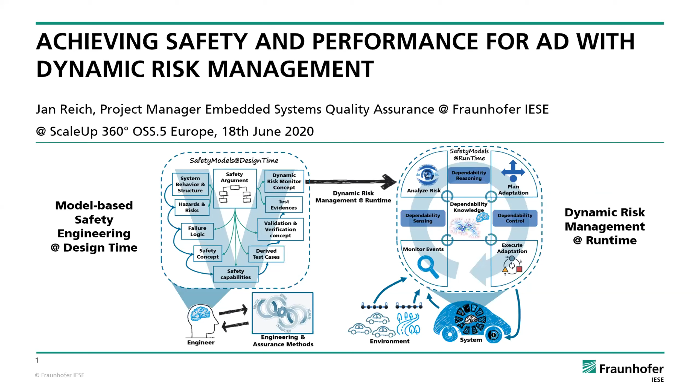But the more interesting bit I'm going to talk about today is how we actually assure more innovative systems that contain high levels of intelligence and also cooperative safety concepts. So it was a perfect talk, my predecessor, which dealt with behavioral safety. My talk is basically about how to operationalize behavioral safety at runtime by using safety models that are used at runtime, where the machine effectively thinks on its own about safety issues and tries to come up with as performant as possible a way to operate in various operational design domains.

So what I have to offer today is, first I'm going to talk a little bit about the motivation of why current safety engineering techniques are actually not sufficient to assure high degrees of automation. And our approach to dealing with these issues is to shift parts of the models of the safety assurance to the runtime. And how do we do that? We are formalizing risk and capability models in order to teach the system how to think about safety issues and come up with a continuous safety assurance at runtime. And in the end, I have a small video demo that hopefully works that intends to show you how dynamic risk management looks and feels.

But first of all, I'd like to show you a small video, maybe of a parallel universe where actually all the challenges that we have already talked about seem to be solved already. So just watch it shortly.

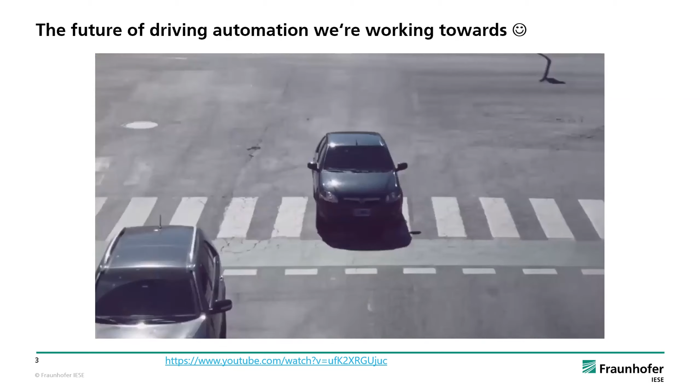Maybe remember just a nice music in the background that unfortunately doesn't play in the stream.

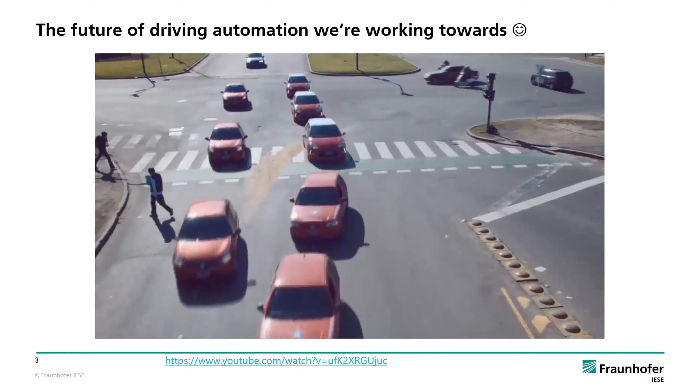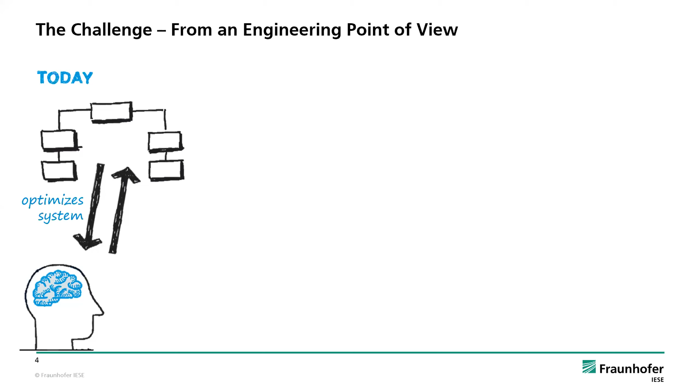But if we look at the challenge and put ourselves in the head of a safety engineer, what we're doing nowadays in order to get safe behavior of autonomous driving is effectively thinking at design time a lot about how we optimize our system in order to be safe. This means in particular, we need to anticipate the context that our system will be in contact with all the time. These are other vehicles, the environment, other traffic participants like vehicles and pedestrians and so on, but also if we have cooperation in place, we can use collaborative knowledge for that. And we might also be able to control other systems in our vicinity.

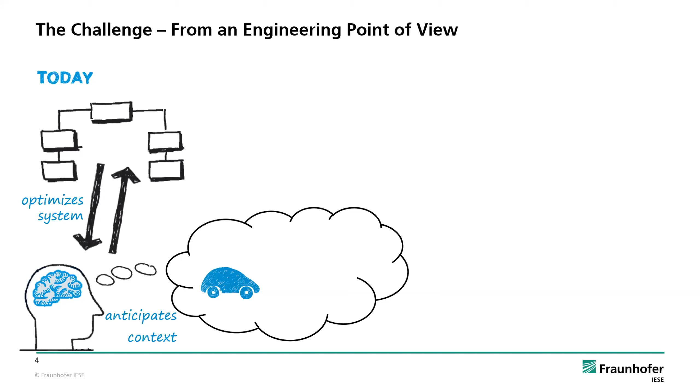And having anticipated the full context and all the situations, like the situation categories and scenarios that we have seen in the previous talk, what we're doing is picking out the behavior for our system. We are implementing it for this anticipated context and making sure it is safe. But this has some problems, in particular if we're dealing with high levels of intelligence being necessary in order to operate in very unconstrained environments as well.

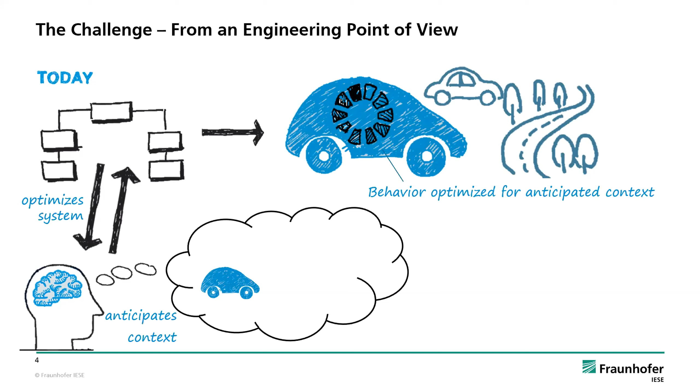So this means we have a lot of uncertainty in place if we want to think of any situation that can occur, since we don't know whether we really covered the situation space both at design time and at runtime. And on the other hand, we also have uncertainties with respect to risk control availability. This means we have certain safety capabilities that are integrated in our car, but we don't even know whether those safety capabilities will be available in all the situations where we need them. And there is a way out of that, and that is done nowadays.

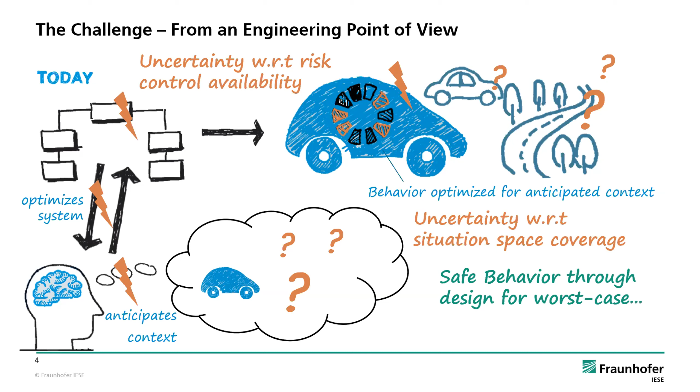And this is actually that we are designing our system and our behavior so that it is safe in the worst case, namely in the worst case of all the situations that our ODD consists of. And at the same time, if we are always expecting, exemplarily spoken, Usain Bolt to jump out behind every parked car, this means our car is ready for it. But in all the situations where the worst case does not occur, we have a very constrained system performance.

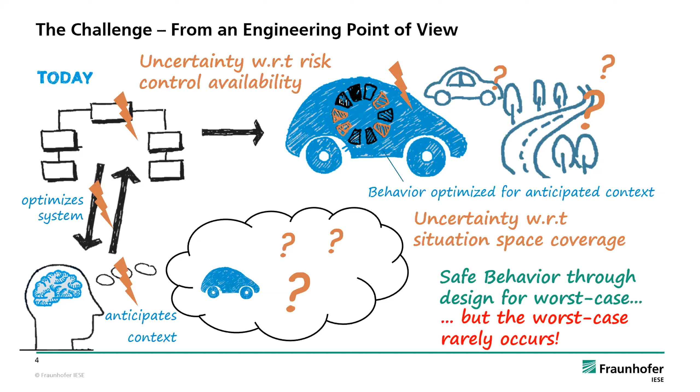And this is actually what I'm going to show in this talk is addressing, and it is called dynamic risk management. The idea behind this is that we are not trying to anticipate every situation and scenario that will occur during the system operation, but that we are trying to teach our system what is the relation between certain situation factors that are influencing risk and the final risk assessment on the one hand. So making this relation explicit in a maybe rule-based manner, and on the other hand, making the influence factors for those risk control capabilities and their availability explicit somehow.

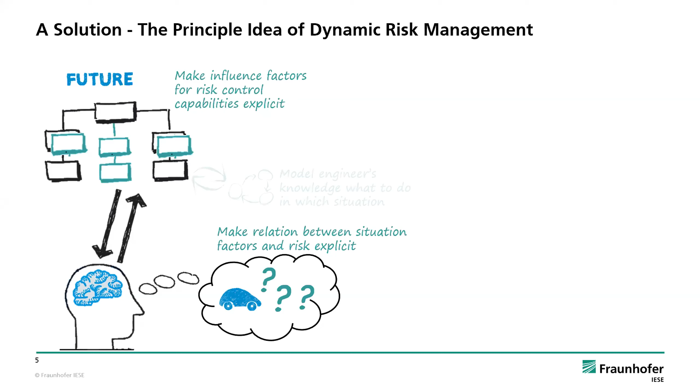And if we are having this information basis, so what is the risk of our situation? On the other hand, what are the capabilities that we are currently having to control that risk? Then we can also model the engineer's knowledge of what to do in which of those risky situations. And what we're then coming up with is a concept that is called dynamic risk management, which effectively means our system has a certain intelligence involved and kind of looks at the environment with the safety glasses on and looks for events that might be an indication for safety criticality or not.

And this means then based on those monitored events, we're analyzing risk and capabilities, we are performing certain reasoning activities, and then we are planning and executing adaptation in order to come up with a behavior that is below the accepted residual risk. And on the other hand, that is performant enough to get the best possible situation performance out of it. And for executing this dynamic risk management cycle, there is some knowledge that is needed, and this knowledge is explicitly those rules that we have to define at design time.

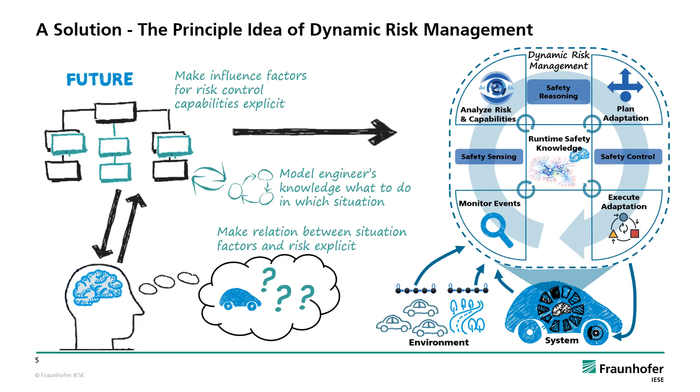So one precondition in order that we can observe whether the behavior of a system is safe at runtime is actually that we need a specification of what safe nominal behavior means. So this is, so to say, the step 0 of doing runtime safety assurance or analysis: that we have a specification of the safe nominal behavior. The example that I picked out for today is the RSS rules. I would think that this is familiar to most of you guys, which are effectively a set of rules that try to formalize both explicit and implicit traffic rules that people adhere to.

And in this case, we have an equation that is expressing what a safe longitudinal distance between two following vehicles is, where the left one is the ego vehicle, and here we have a lead vehicle. But there also exist rules for other traffic situations. And those are derived based on kinematic parameters. So the big question here is, if we are deriving a safe distance specification based on kinematics, then for all of these parameters we need to somehow assume what the deceleration capabilities of our lead vehicle are in the current situation. And at the same time, we also need to know what our capabilities are in the current situation, for instance, the minimum deceleration capabilities. And so it boils down to what we are assuming for those parameters in the current situation.

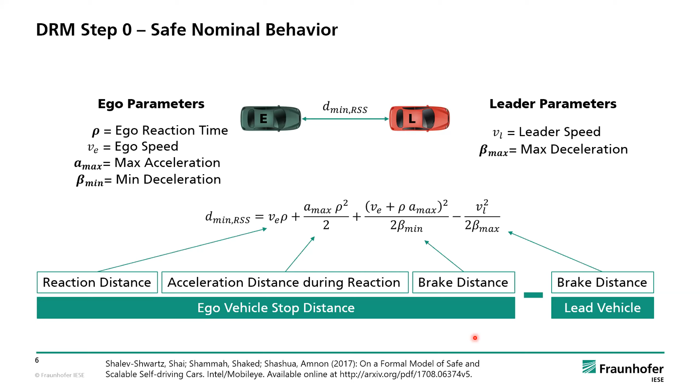But we at Fraunhofer asked ourselves, can we do better? Because again, it is not always the worst case happening, so to say. So can we somehow detect what assumptions are true in the current situation? And this is actually what dynamic risk management is about.

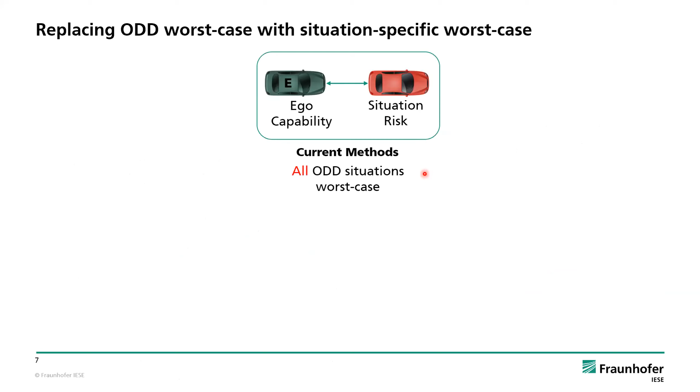So we're trying to actually replace or enhance the current methods that are, so to say, dealing with the worst case from all ODD situations on the one hand by looking at, well, what is actually affecting in my environment, what the situational risk is.

And if we are looking at a car following scenario, then we are seeing, for instance, looking at our own human experience, well, when I'm driving as a driver, then I would assume this red car not to brake without any reason, so to say. But I would say that the situation somehow around this red vehicle is actually forcing it to decelerate.

So this could be, for instance, a truck that is driving with a much lower speed, or it could be like this blue vehicle merging into the lane just in front of the red vehicle, or it could be, for instance, a traffic jam that is actually forcing this red vehicle to brake harsher than in normal driving. And that is somehow subsumed with a braking intention that we want to find out during dynamic risk assessment, but it is also related to the braking capability.

And there we are also looking at physical inputs. So for instance, whether a certain braking distance for this vehicle is effective also depends on a road surface coefficient. And risk is not only about whether braking happens, but also how severe the collision consequences are if that braking is about to happen. And there, the usual models are typically dealing with that delta speed between vehicles, where we can get an approximation of what the collision severity might be.

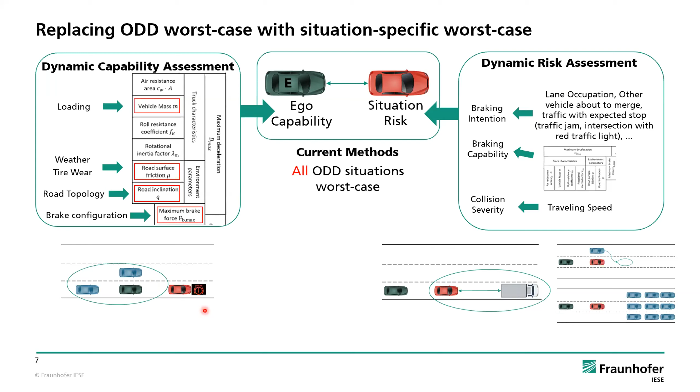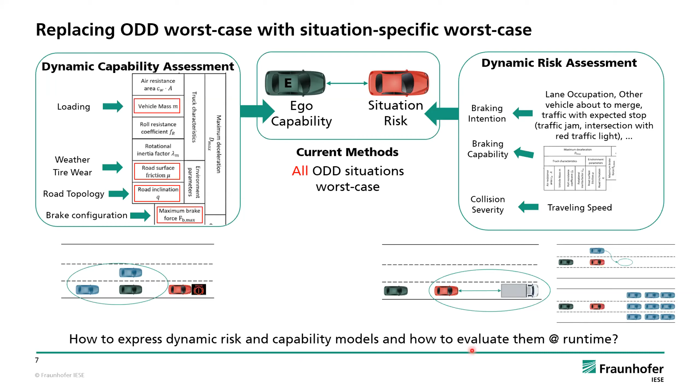then my capability space is constrained. And so if we want to teach those kinds of activities, capability and risk assessment, to the vehicle itself, we need to find a way to formally model those dynamic risk and capability models so that they can be evaluated at runtime. Starting with the risk modeling: basically expressing how a certain behavioral hazard that our system may have at a certain point in time leads to an accident. And typically this goes over a critical situation and controllability aspects.

And today this is mostly done by using surrogate safety measures like time to collision, or for intersection scenarios we have post encroachment time. There are really a variety of different surrogate safety measures, which all have in common that the critical situations are found by using simulation. So this means we are taking a scenario catalog, like my predecessor has talked about, and computing the time to collisions for a lot of variants of the input variables for those safety measures. And then we are seeing whether we get an accident or not.

And what is also interesting about those is that they are mostly removing situational context from risk modeling. For instance, we can compute the time to collision just based on the speed vectors and the directions of two cars, and then we have a conflict point. But if we look at how humans judge risk, we will see that the risk is pretty much dependent on whether this exact behavior is happening on an intersection or on a highway. So the risk judgment might differ in those cases. And this is also a major weakness of the metrics that we have nowadays, that they don't consider situational context knowledge, like described on the previous slide, sufficiently. So they are much more worst case than they would need to be.

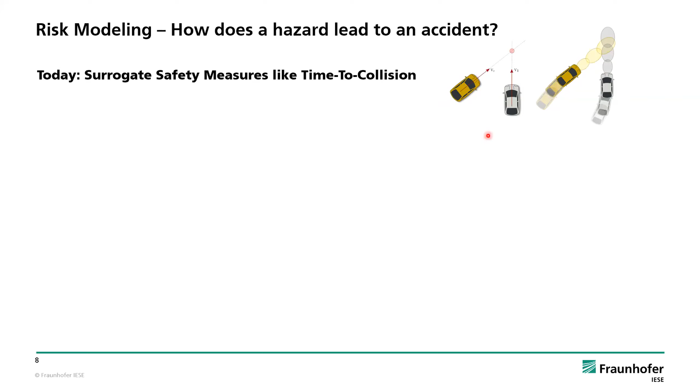There are also probabilistic variants of those where we don't deal with points and vectors, but we are dealing with spaces, so to say, that are overlapping based on probabilistic constraints that we're having.

So how we could do that tomorrow is actually to really factor in situation knowledge. And this means making situation class specific risk metrics that are explicit with respect to the situation that is occurring. So if we're looking at this simple intersection scenario where the ego vehicle should turn right and a pedestrian is passing the pedestrian way and the green light, then we could actually model what is the expected behavior of the ego vehicle, which might be, so to say, an abstracted functional model of what, for instance, the traffic regulations demand of my ego vehicle in order to be safe.

This means on a very high level, we need to determine the right of way properly. We need to determine the pedestrian presence at this space, so to say. And if we know that there is a pedestrian present, we also need to predict whether he is going or not, because if he is staying here, then we are allowed to drive, even if the pedestrian light's green. So this is, so to say, the expected behavior that we model for our ego vehicle.

In a subsequent step, we are thinking about what are unsafe deviations that will lead to a pedestrian run over. And for each of those functional blocks, we are thinking about critical deviations. This means, me as an ego vehicle, I determine the right of way wrong. I have a confusion, and this might lead in consequence to something that is critical. Namely, if I misjudge that the pedestrian traffic light is green, then this will lead me to driving there, maybe, if I don't detect the pedestrian as well.

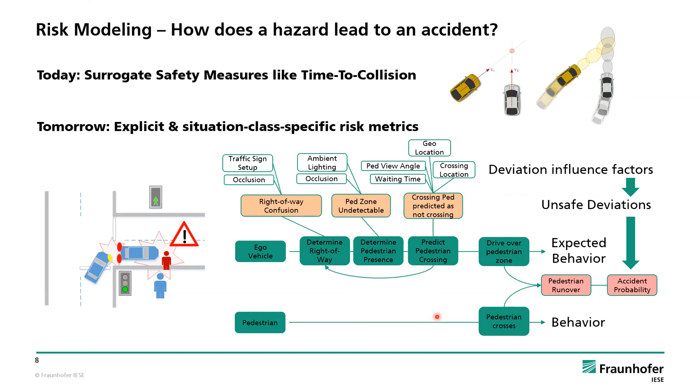This is not a formal model right now, but what we are using in order to make these causal models really formal is Bayesian networks, not only because they can be computed pretty efficiently at runtime, but also because they have the power that you can propagate uncertainties. If we're looking back at those influence factors, it's not possible to perceive them perfectly. There will always be a perception uncertainty with respect to those. And this is the reason why we are using those Bayesian networks to factor in perception uncertainties and propagating them to the behavioral risk.

And the reason is that if we wouldn't do that, we would get a risk assessment that, for instance, there's a high likelihood that we have a certain accident in the end. And if this assessment was made based on very, very uncertain information, then actually we should probably be a bit more worst case than we should be if we have perfectly certain or more certain information.

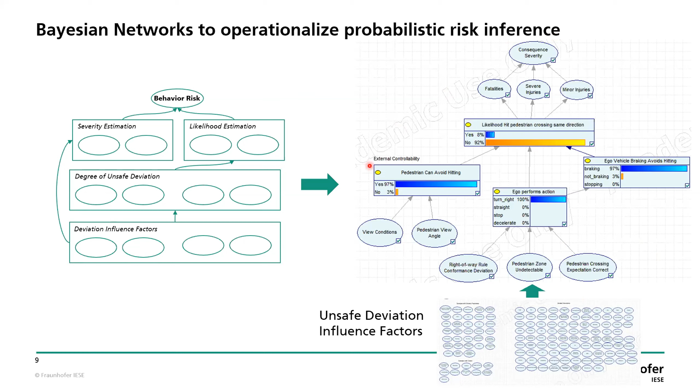And what we've developed there is actually a pattern structure that can deal with a variety of different situation classes. You see just a small excerpt of the different influence factors that we have just for the crossing situation that we've just seen. And these are then effectively fed into those behavioral deviation nodes, so to say. In the end, we have a causal model that is allowing us to get an idea about risk under uncertain information. And we have coined it with the name SINADRA. It's called Situation Aware Dynamic Risk Assessment.

And it not only has the runtime aspects where we just get out a Bayesian model that we are inferring at runtime. The important bit from a safety engineering perspective is also that we make sure we didn't forget any of the situation factors, and we have the necessary confidence that we didn't underestimate the risk in our Bayesian network model.

And for that case, what we are doing is we're taking as a principal input the ODD and an AV behavior model, and by using model-based design time safety engineering, we are coming up with something that looks more or less like a HARA, but is much more detailed and does not only try to search for the worst case situation, but analyzes situation classes, so to say. And based on this sub-ODD specific risk causality model, we are using the pattern that I've just shown and parameterize it with a situation factor distribution.

This means, for instance, that we are exploiting the specifics of distributions. For instance, if we are in commercial areas, which our ODD consists of, then we have much different distributions for pedestrian appearance at different places, and we can factor that into the Bayesian network by looking at what are the principal ODD subspaces that we are having, and what are the situation factor distributions for the influence factors. And this is all what we are building a safety case out of.

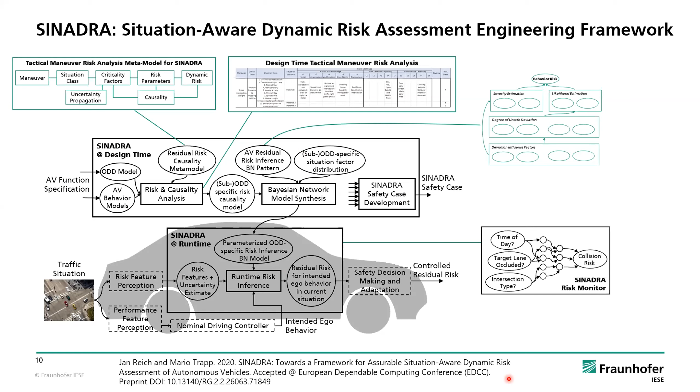So coming up with a safety argument that comprises these activities and tries to make sure that the runtime model that we are inferring at runtime is, so to say, safe with respect to an argumentation basis. So we also just got a paper accepted that is describing the building blocks of this framework. And now, having described how a risk assessment can work, meaning how a hazard relates to an accident over the situation influences, let's look at the other side, which is dealing with the dynamic safety capability assessment.

And there we have now researched and also applied, I think over a decade right now, the concept of conditional safety certificates. Model-based means to express variable safety concepts of our ego vehicles. So we can, for instance, think of this situation where we have a car following scenario, we definitely have the emergency braking capability. In addition, we would also have the evasion capability, but let's exemplify the conditional safety certificates for the emergency braking capability. And this means that we first need an idea of the architecture of our capability functionality.

So keep in mind that this is a safety functionality here that is engineered at design time according to typical standards that we have, like the ISO norm. And if we're looking at the emergency braking capability, then we can, for instance, monitor our brake system itself for what is your current tire wear, what is your principal braking force that we can apply at all in the best case, but also in the current case. And if we are looking at the vehicle platform, then there we would maybe get some information about the dynamic mass that our vehicle has.

This is much more important for trucks, obviously, but we might also look at the environment for getting an idea about the road surface conditions, which also affect how effective our emergency braking will be. And as a special feature, since we're using here a service-based modeling format, we can also use vehicle-to-X monitoring functionality to also get information on an assured basis from a different vehicle. So this is effectively how the safety channel looks. And the conditional safety certificate is attached to this service architecture that we're seeing here, and it actually defines certain safety guarantees that we can give for those services.

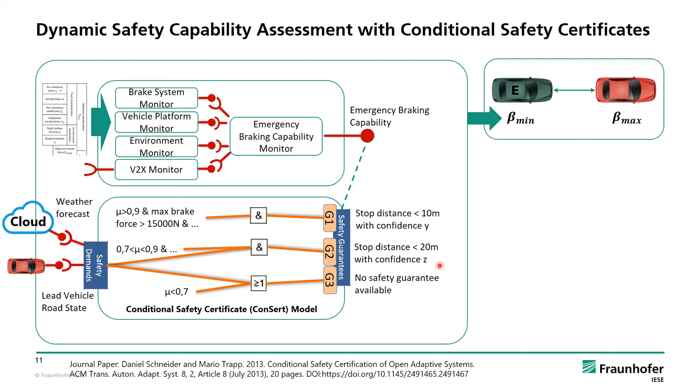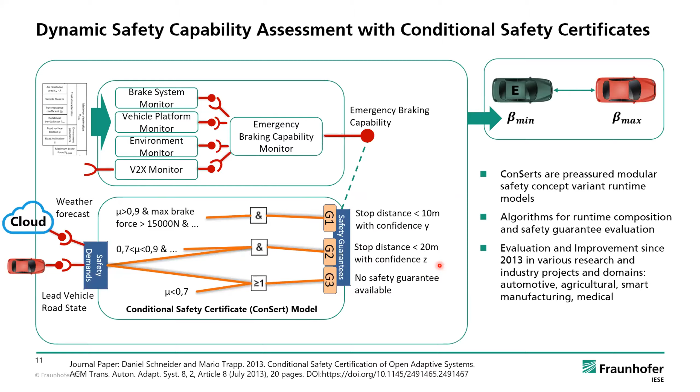So this is not just an easy model. It's just the result of the stuff. We want to not shift everything into the runtime, but just have some variables that we want to resolve. Okay, I will skip over that and just show you how this ConSert works in practice, if it works.

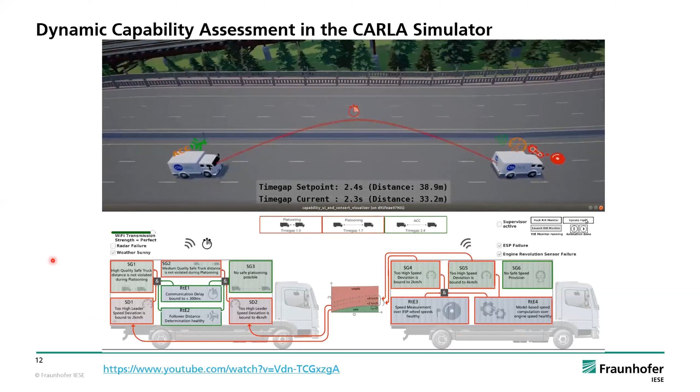Last but not least, I want to talk very quickly about the design time safety engineering aspect. The models that I've just shown, these Bayesian risk models and the ConSert models, don't come out of nothing, but have the whole design time safety engineering backbone behind them. So for each of those models, we need to make sure that we have proper engineering methods in place that result in those models, and that the models are capable of being consumed by the car in a fully formal manner.

And how we at Fraunhofer approach this: for the design time aspect, we have a design time engineering toolchain called safeTbox, which allows us to produce those runtime models in an assurable manner. What comes out in the end is a safety argument, along with the evidence that we have the right models for the right tasks. And the runtime component is called safeTsupervisor, where we have realized, based on the ROS framework, runtime components that are able to consume the models we produced at design time semi-automatically, and then run them.

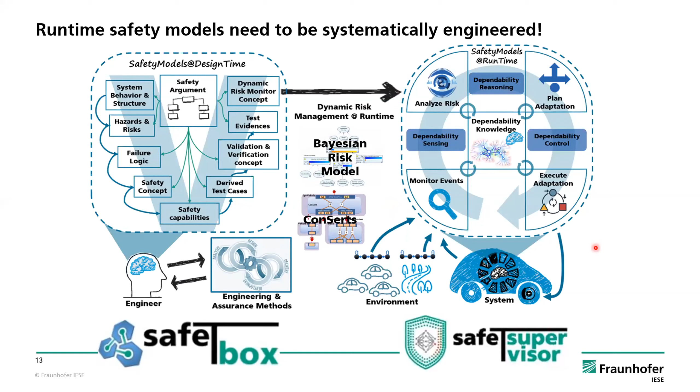So coming to the conclusion, what is very important in order to make this dynamic risk management concept work is that we need formal definitions of what safe operation means in terms of behavioral safety in the absence of failures.

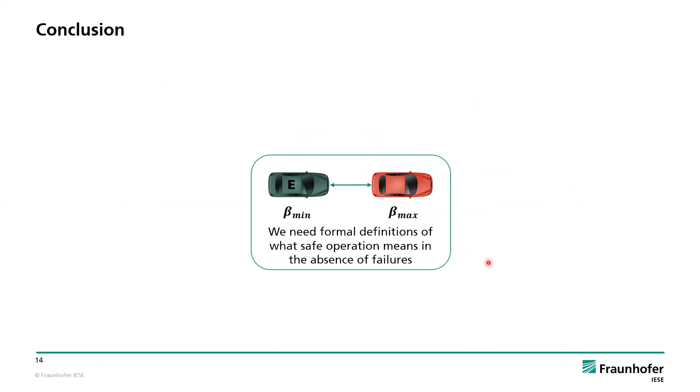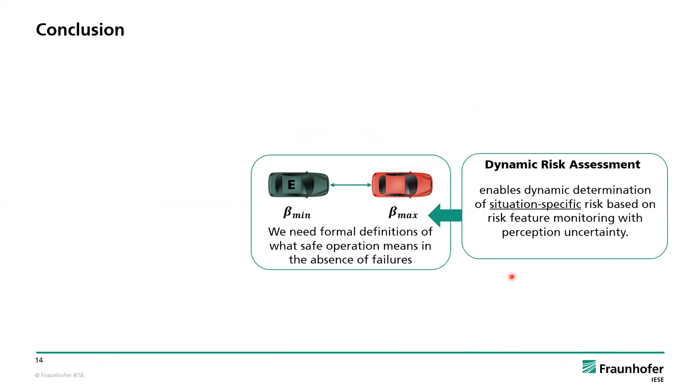And based on such a definition, we can then decide what are the situation-specific factors that we need to monitor in order to get an idea about dynamic risk. On the other side, we can use conditional safety certificates to express variable safety concepts that allow us to get an idea what the currently available safety capabilities are for our ego vehicle.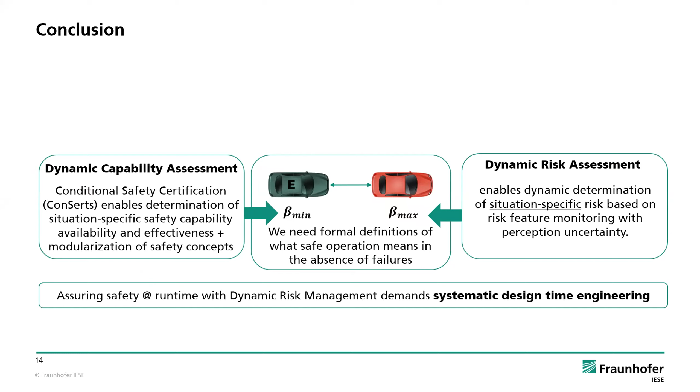In order to make this dynamic risk management control run, we also need systematic design time engineering to make sure that our runtime models are sufficiently safe. And not to forget that this dynamic risk management framework is dealing a lot with behavioral safety, but that does not relieve us from making sure that safe operation in presence of failure is also assured. So this is a precondition, and functional safety needs to be assured at all.

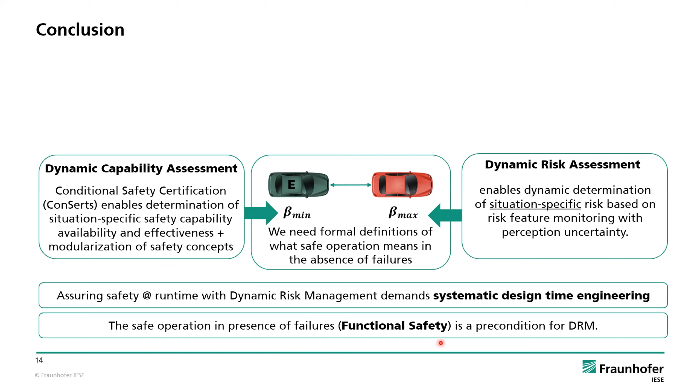And if we did all of these things, then we can use the dynamic risk control aspect to compare, on the one hand, dynamic risk with the dynamic capabilities that we have. And this enables us to really control the system behavior to be just below the residual, so the acceptable risk, so to say, but still achieve a situational optimal performance. And that is the goal that we saw in the initial video.